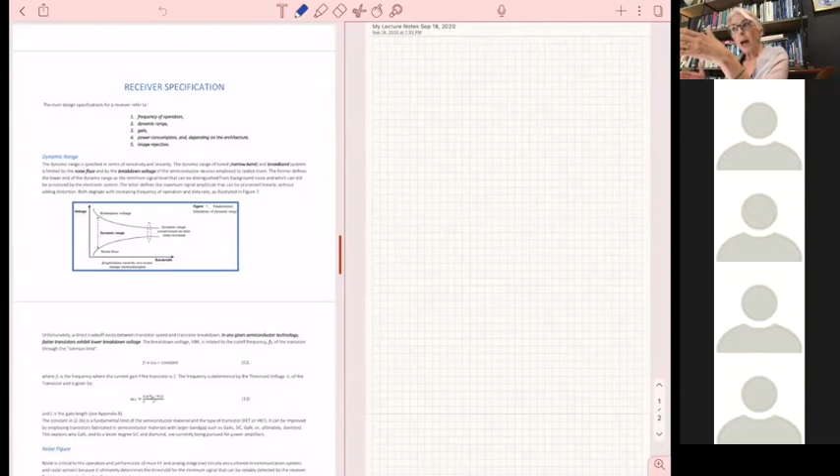You split the two paths before the mixing, and you mix the signals 90 degrees out of phase. So one path you call in-phase, the other path you call quadrature, because it's 90 degrees out. You mix them, and then you either recombine them or mix them again and so forth. But the idea is, whether you have a mixer before, a mixer after, two mixers after, and so forth, the goal is to split your signal into two paths and introduce a 90-degree angle into one path's phase. This way, mathematically and accurately, you cancel out a very large number of spurious frequencies that would be very difficult to get rid of in the IF.

That's the basic idea. Then we talked about the direct conversion receiver and some of the issues with DC offset and so forth - there is a possibility of getting DC through your receiver and everything. And how people have dealt with that by also introducing I and Q paths in a direct conversion receiver. Okay, so that is the basic idea.

Now, what I would like to do is talk about receiver specifications. If you try to do a design of a receiver, you will have specific numbers in mind that you have to satisfy. And of course, one, as you can see here, is the frequency of operation.

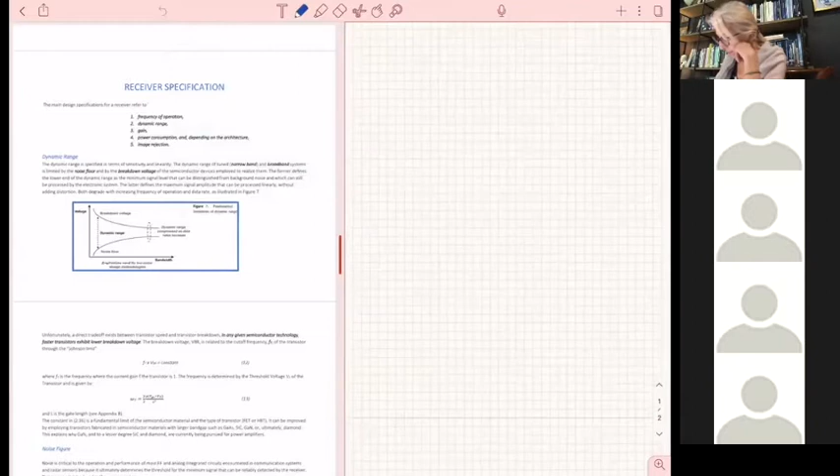So if I were to write here, I would say number one - okay, well, that does not want to... I don't know what the problem is. One. All right, well, let me try again. All right, I will just talk about this and I will show here. One is

the frequency of operation, and the frequency of operation here is important to have, because that's exactly where your receiver operates. And I told you, you will have selected by Monday your frequency of operation, your bandwidth, and the type of your receiver, hopefully.

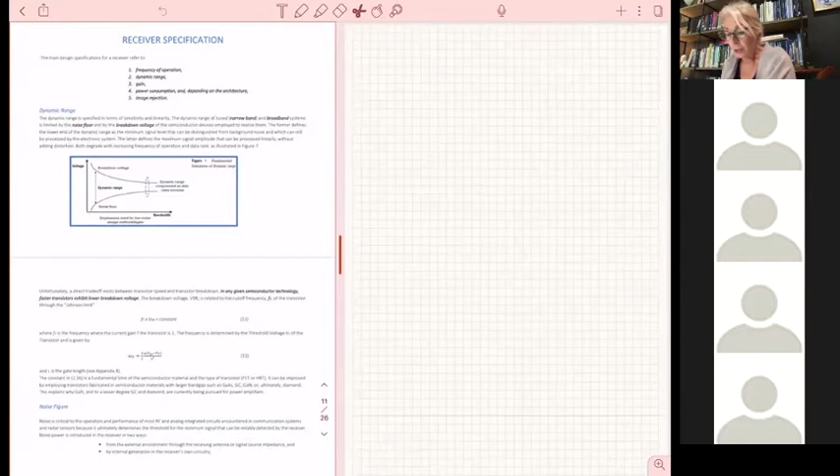Then these are fundamental. After that, you talk about dynamic range. What is the dynamic range? You can see it here in the picture. The dynamic range, practically - I think it's, the problem is my pencil, which is supposed to work. Okay. All right, then cut.

There it is. It's nice software to work with, but it also has its own problems. So the dynamic range says the following: in a receiver, we bring a voltage in. This is the voltage that you bring into a receiver.

When you bring the voltage in, you would like to have a receiver that can go from very low voltages to very high voltages, and that is called dynamic range, because then you can go from very, very low signals to very, very high signals.

Unfortunately, this dynamic range has its own problems. You see a reverse relationship. Unfortunately, what happens in most designs is that the two parameters we want to increase at the present time are related through a reverse relationship. So that's why we always have to do a design compromise - what we call trade-offs.

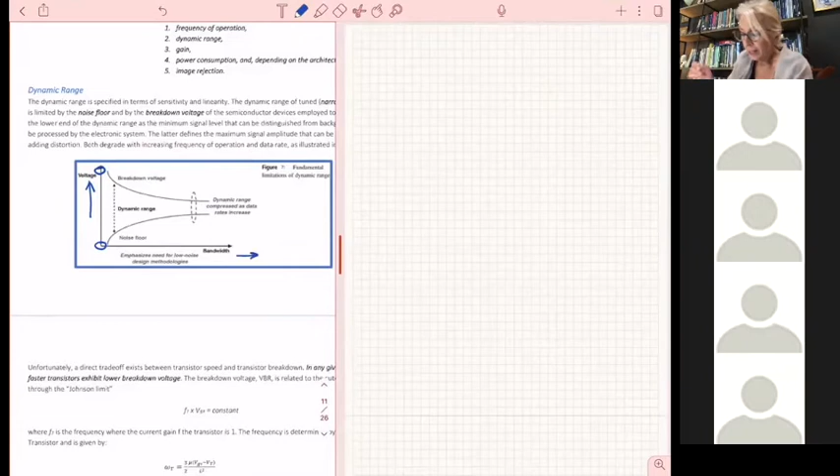If both things were increasing at the same time, and if both things were decreasing at the same time, it would have been much easier to make a good design. But for example, we would like designs to have very large bandwidth, but the problem is that the dynamic range becomes narrow.

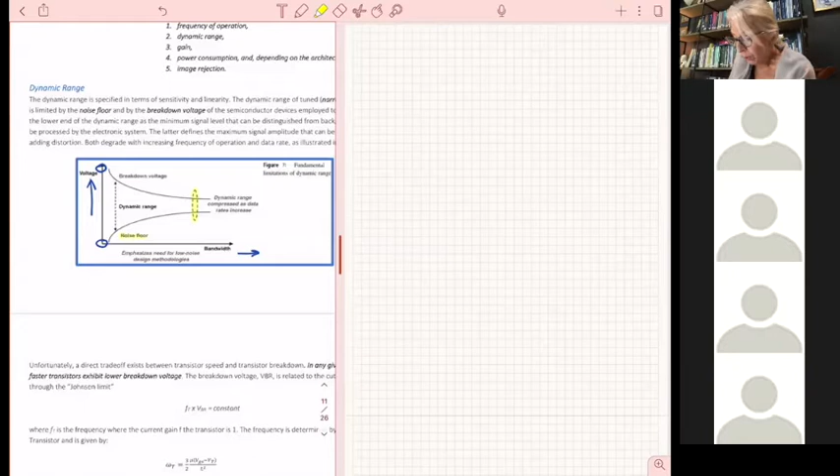And there are reasons for that. In the design, we have to reduce the noise floor. The higher the noise floor, the more your resistive losses, the more your dielectric losses, the more whatever other sources of noise you may have from your transistors and so forth. We talked about some fundamental thermal noise, which is fundamental to resistors and other resistive losses you may have.

In the dielectric. And then you have some flicker noise, which is important for the lower frequencies, and some other things that come from the transistors. So all of these are noise sources. As your noise grows higher, then as your bandwidth grows higher, you have a reduced dynamic range.

What happens when the noise goes higher? You cannot see as low signals anymore - you lose your signal into your noise. For example, if your signal were to be at that level, you can see the signal in the low bandwidth, but as you go into higher bandwidths, the signal is lost into your noise and it's very difficult to demodulate it. The other thing is, of course, as the bandwidth increases, your breakdown voltage decreases.

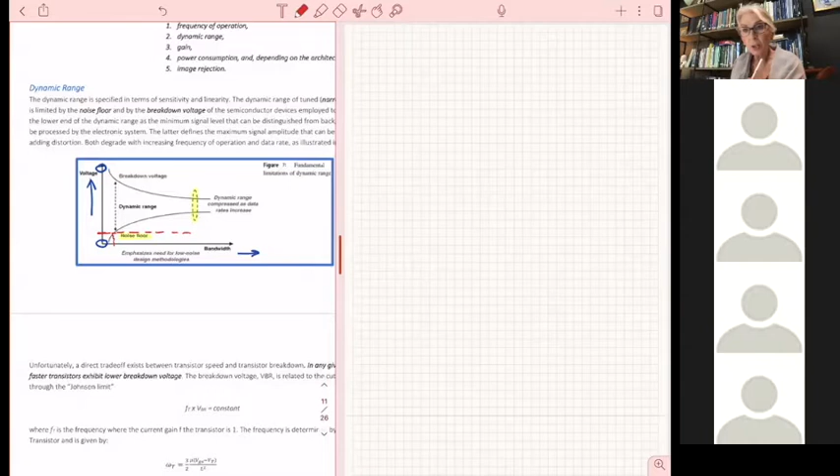And also as your frequency increases, or the speed of the device that you have increases, your breakdown voltage decreases. And for those of you who have done MOSFETs, remember that usually the current flows from the source. So the gate looks like this.

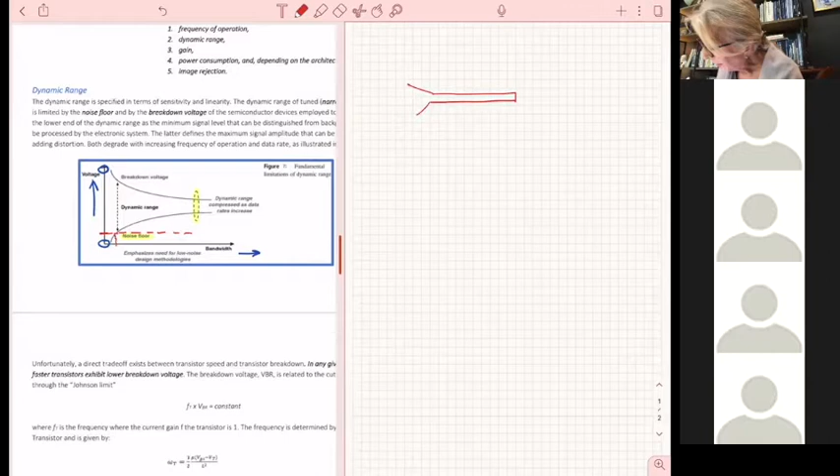We talked about that some time ago. The gate looks like this, and then you have your drain here. The gate length, and the material below the gate - the gate length itself and the gap - are extremely important in how much current will go from the source to the drain and how much current you're going to have from the transistor.

However, to be able to achieve that, you need to do two things. You need to reduce the gap below the gate to make it faster, to make the electrons go through faster. And then also you need to reduce the length to be able to have better performance and more bandwidth.

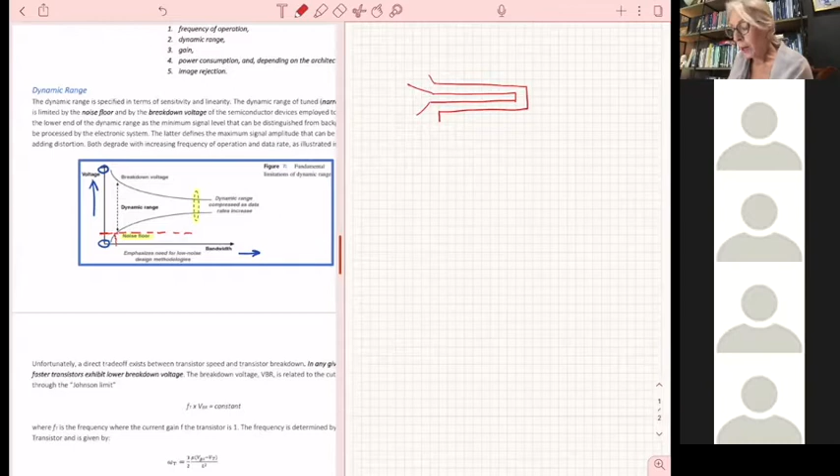In the process of doing that, however, because you reduce the thickness of the dielectric, the breakdown voltage becomes much lower, because now you put a lot of voltage into a smaller thickness of dielectric, and then you have a breakdown. The same thing applies with the bandwidth - as you increase your bandwidth, not only does your noise go higher, your breakdown goes lower, and then you lose your dynamic range.

So dynamic range is very important. Then we talked about FT, which is exactly where the gain of your amplifier becomes 1. The FT and F max are extremely important, because both frequencies show you very high frequencies. So if you operate a transistor at 40 gigahertz, your FT and F max have to be very high, like 250, to be able to have good performance.

Otherwise, if you're too close to your FT, that means that the gain of your transistor practically has no gain - so that's not a good transistor. And when FT is very high, and F max is very high, then you have substantial issues with the intrinsic and external performances of the device. The intrinsic performance is important for FT.

The external parasitics, in addition to the intrinsic ones, are important for the F max. So both of them have to be very high.

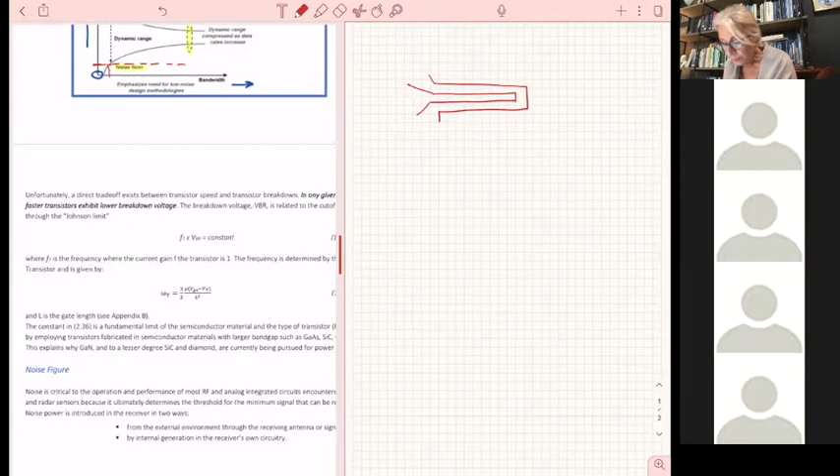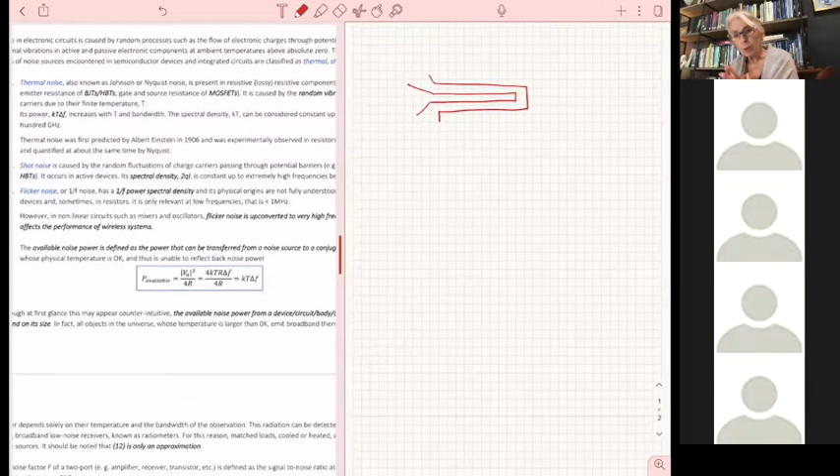Noise figure also is extremely important. We'll see this again, so I'm not going to spend too much time on it right now because we are going to calculate that later. Noise figure, however, is extremely important because it's connected to your losses.

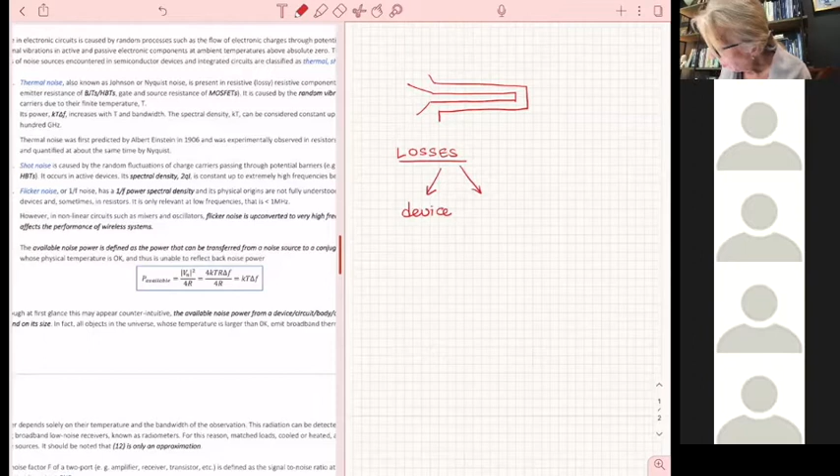We said you have two types of losses, more than two practically, but you're going to have losses from your device, and then losses from your matching networks. Matching is going to be absolutely critical to make a device operate like a low noise amplifier, or if you are in a transmitter, like a high power, high gain amplifier.

Usually low noise amplifiers have lower gain. Let's assume you want a high gain amplifier, you can compromise your noise, but you still have to match it. What you use in your matching networks is extremely important.

Your device is going to be whatever you have intrinsically in it, plus the external parasitics. For example, what are the external parasitics? Your device comes with pads so something else can connect to it.

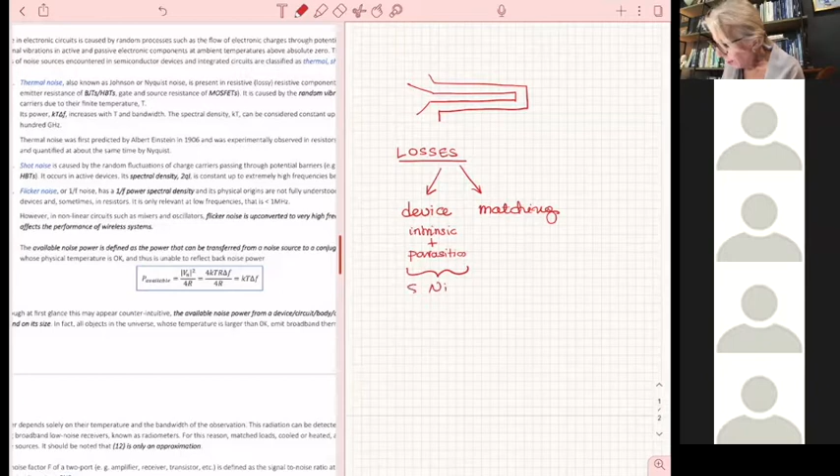Those pads include parasitics. Your device designer, not you, will give you the device, and for most receiver designs, they will give you the performance specs. So they will give you the noise characteristics of the device, or what we call the signal to noise ratio, or they can give you this factor, which is called the noise factor.

All of these are connected to two kinds of losses: resistive losses due to metals, resistive losses from dielectrics, and then resistive noise from the device, plus intrinsic noise from the device. All of these will be incorporated here.

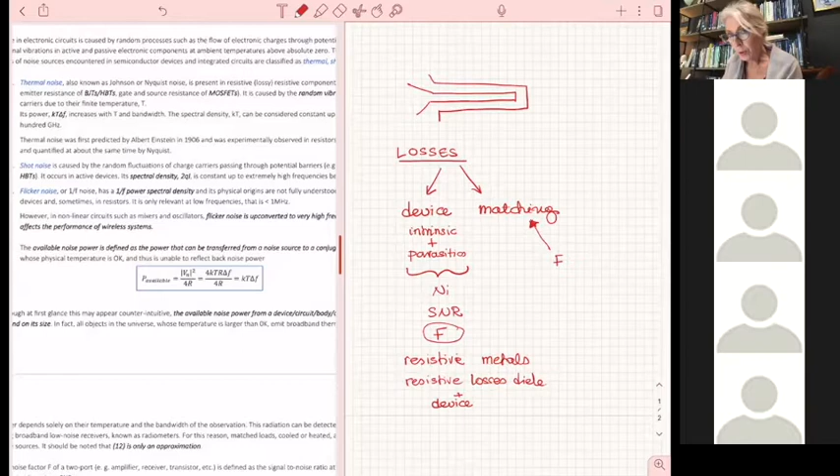As a designer of the receiver, your goal will be to identify the matching networks and then identify the F of this network. So eventually you would like to find the F of the whole device. So practically, how do we define the noise factor?

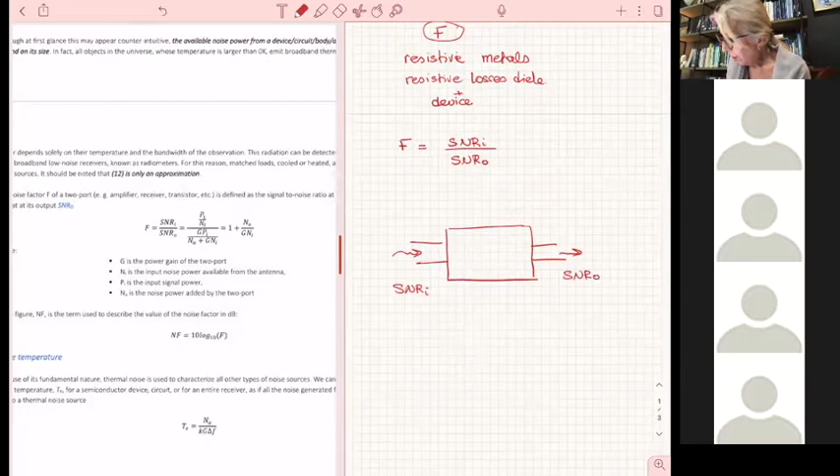F is the signal to noise ratio that goes in divided by the signal to noise ratio that goes out of your device, or whatever circuit you are analyzing at that point. It could be a 2-port network. If this is SNR in that goes in, and this is SNR out that goes out of the system, then the ratio of the two is the noise factor.

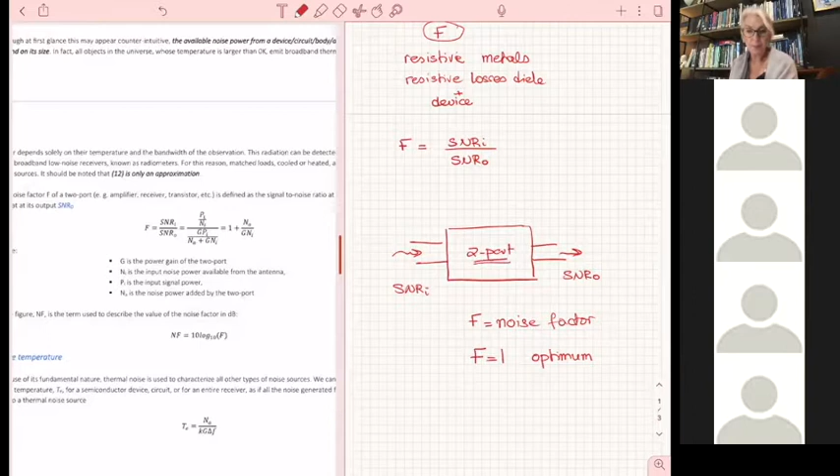That noise factor, the way we have defined it, at best is going to be 1, which is the optimum. That practically says that in terms of noise, your 2-port network does not add any noise to the system. So optimum F equals 1.

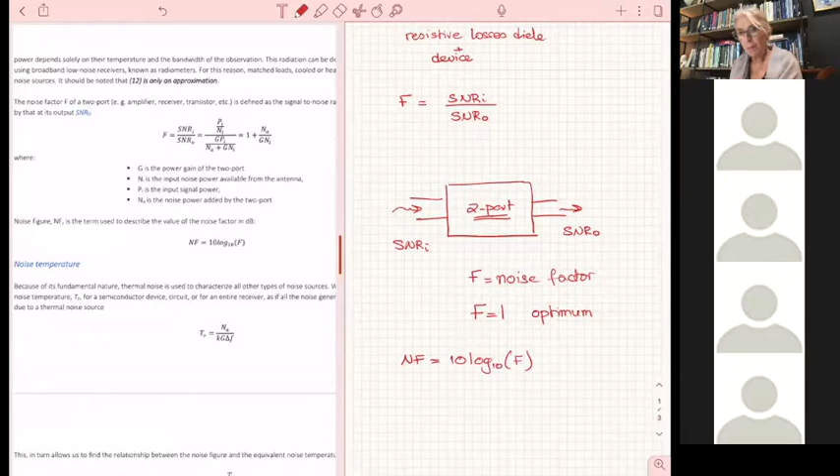Then we have the noise figure, which is the 10 logarithm of F. Why 10 logarithm? Because F is always in terms of power. When it comes to noise, yes, we are using equivalent noise sources like voltage sources or current sources, as you have seen in active devices, but here, when we start talking about networks, we are talking about power, noise in power.

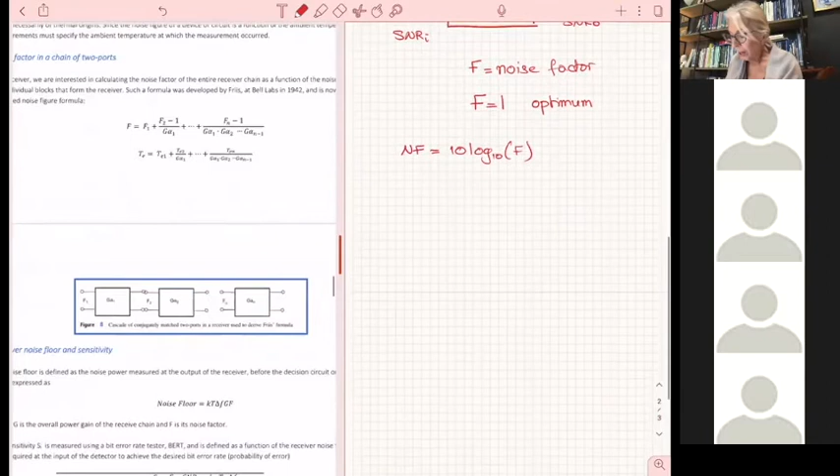We'll come back to noise temperature and all of this. I would like to show you that now because we have talked about networks, and I would like to show you how eventually we will calculate the losses of a network. Practically, as you remember, we combined networks, and we said that if we have networks connected like that...

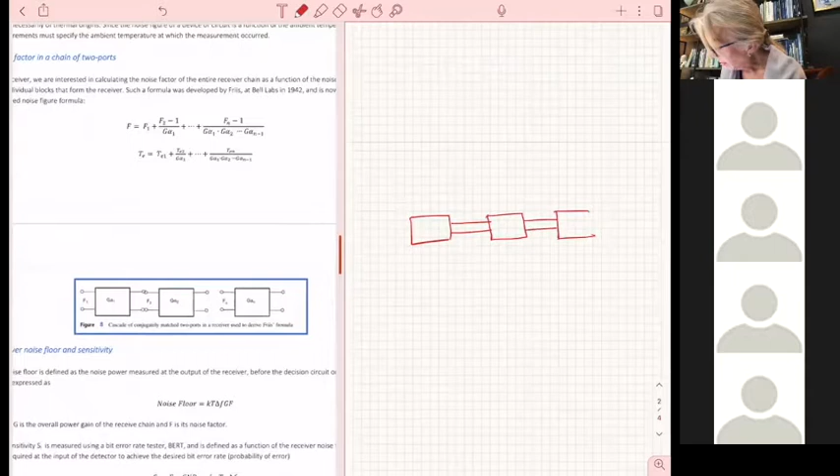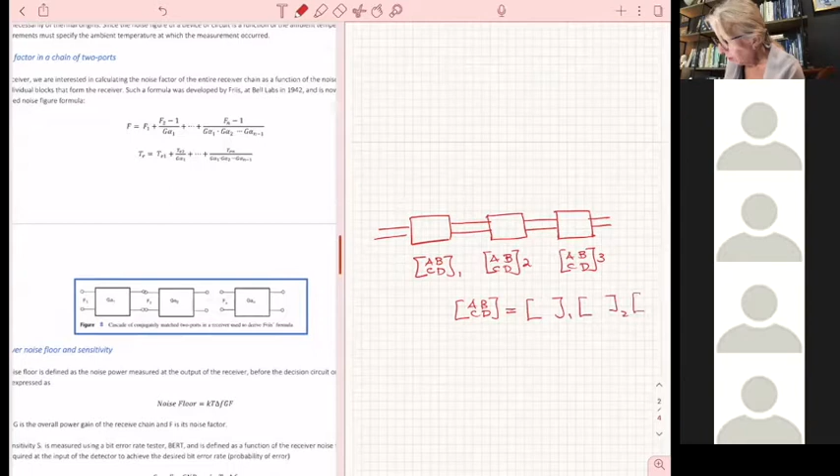If we identify the A, B, C, D matrices of network 1, 2, or 3, then practically we can combine them to find the total one. The noise figure is not any different or independent from this. Practically, by using this approach, the total A, B, C, D matrix is going to be the product of the three.

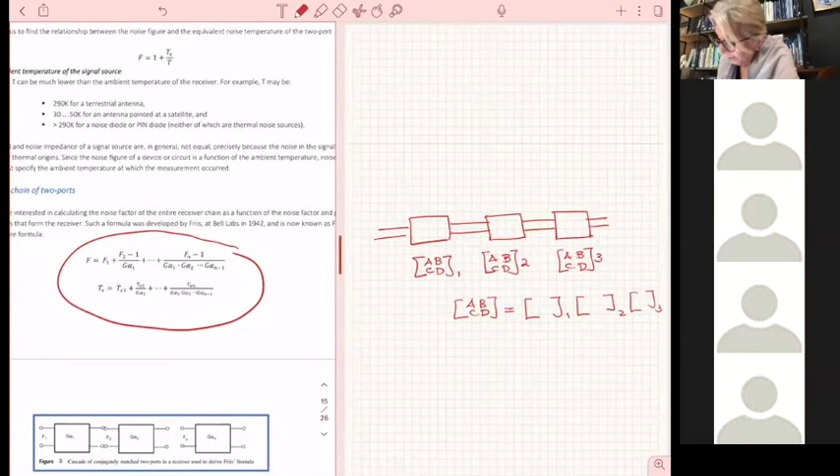Then you can also demonstrate this very important formula for the total noise factor F. If this is network 1 with gain G sub A1, this is network 2 with gain G sub A2, and so forth up to network N with gain G sub AN, then practically your total F is given by this summation: F1 plus this formula, and so forth.

Now, why is that important? Because you can take your receiver, and let's assume you have a simple receiver: your antenna, here your bandpass filter, here a low noise amplifier, and let's assume you do one mixing stage for a moment.

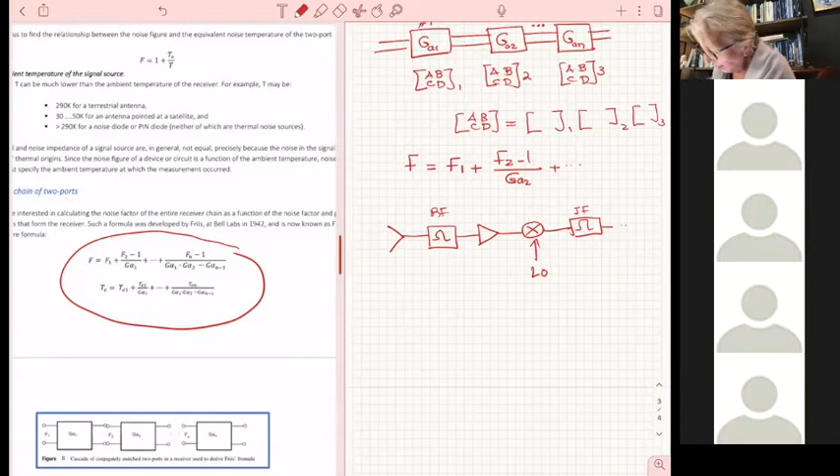Then you have here your IF filter, this is your RF, and so on. Let's assume you stop there for a moment. Then you can split that into the antenna. We're not going to design the antenna, so this is going to be your GA1, F1.

Student: So input, I have a question, is that supposed to be F2 minus 1 over GA1? Instructor: Yes, thank you.

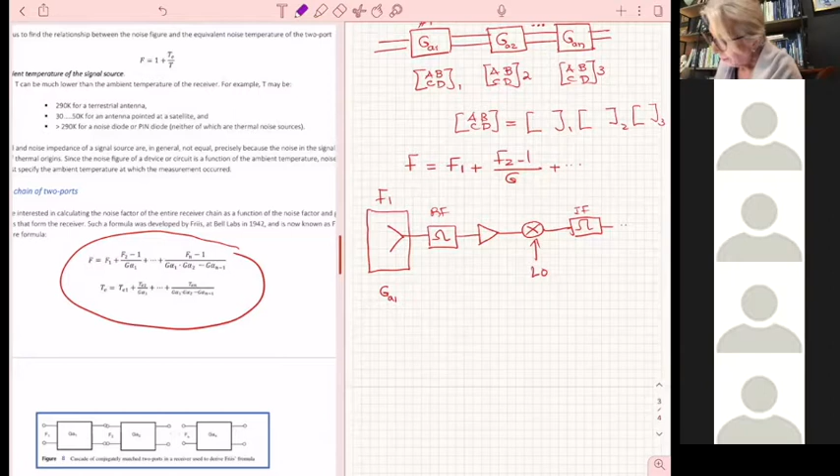I think that should be alpha, as it is on the notes. It's not A, it's alpha. Here they have it as A. It does not matter.

So, and then F2 and so forth. Either you can start, you will see applications where your first network is F1, or they will say that this one here is my input. I don't care about the antenna, I will assume whatever comes from the antenna is my input here. And this one is my F1 and has, of course, a GA1. And this is my F2, and so forth. So practically, you can treat each one of them as one 2-port.

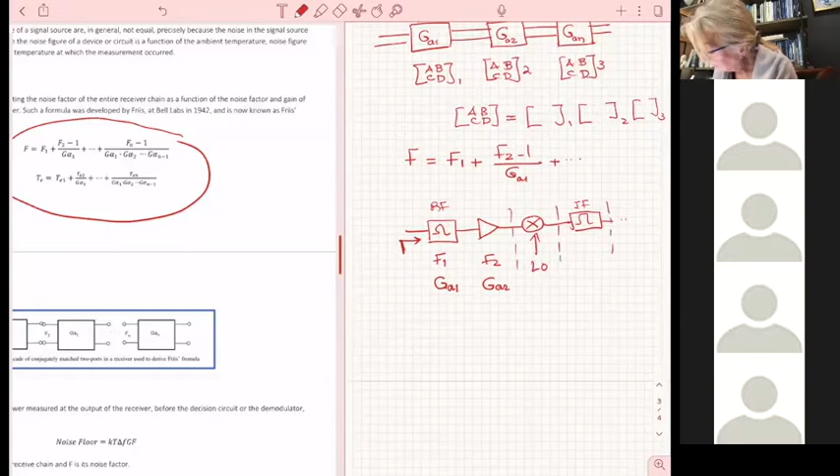Even if this is a 3-port, eventually you can treat it as a 2-port, as you will see. And then by using this formula, you can find your noise factor of your whole receiver, at least the part of the receiver we are responsible for. That's why this formula is important. So you can break down your whole receiver into parts, and that's what we are gonna do.

Every part of your receiver that you're gonna design is gonna be 50 ohm line in, 50 ohm line out. And if there is a matching, it will have to be inside your network to make it easier. That's what I would suggest. Others may select to do it a little easier, and say I don't want to have one matching network from my filter on one end and another matching network from my low noise amplifier on the other, and I would like to just match them directly. You can do that too.

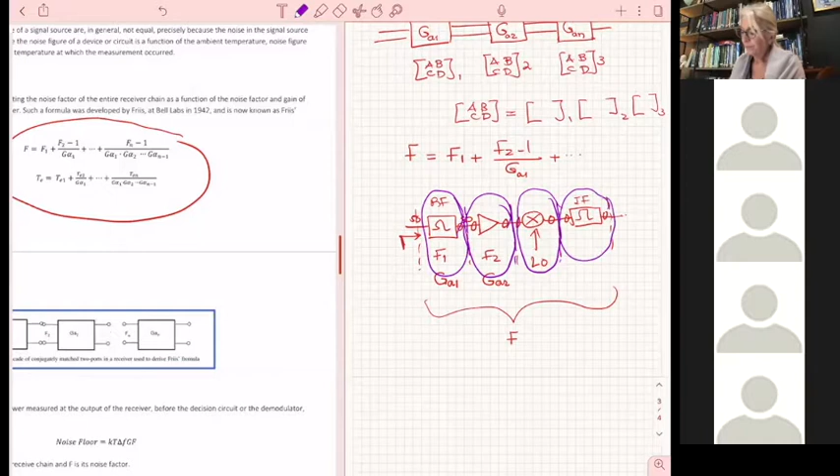But at the end of the day, the easiest thing is to break your receiver into parts and deal with each part separately. Identify all of the characteristics for each of these parts and then combine them. That's why this is important.

Now, with that, since we are talking about noise, we have seen noise before. We have not talked about it in the form of noise, but we have seen losses and we have talked about the impact of losses on Q. Do you remember why we talked about losses and then indirectly it is included into Q? Why is that? Do you remember how we have defined Q?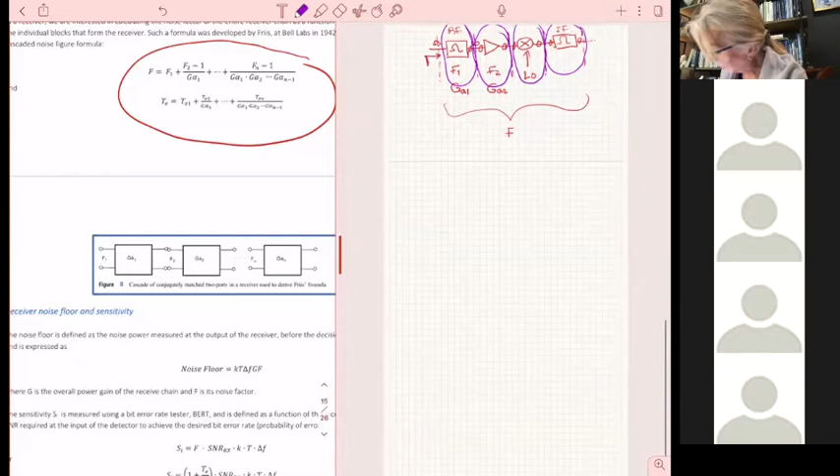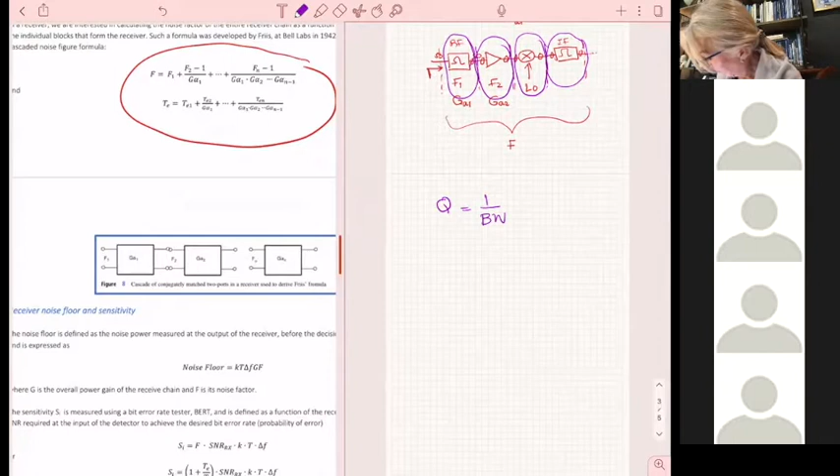How have we defined Q? Student: 1 over the bandwidth. Instructor: Yes, that is the outcome. You remember that, all right? So Q in reality is 1 over the bandwidth, very important relationship. If you know one, you know the other, obviously. Student: And it seems like that corresponds to the first graph, that as bandwidth increases, the noise floor increases as well. Instructor: Yes, exactly, you see that correlation here, all right?

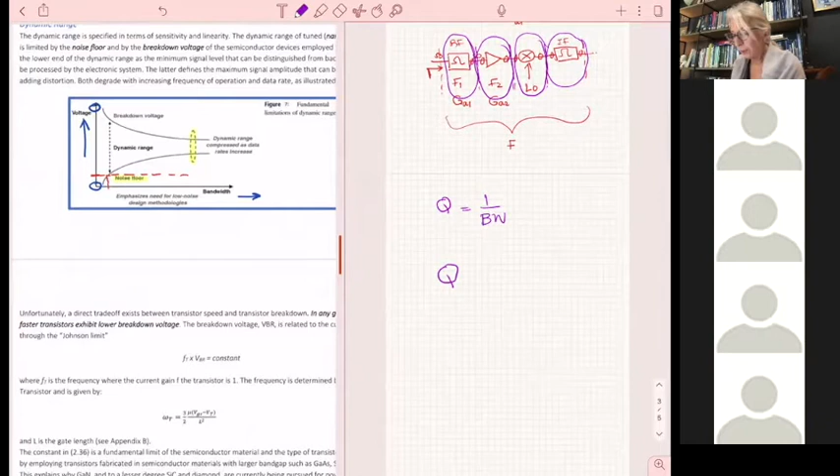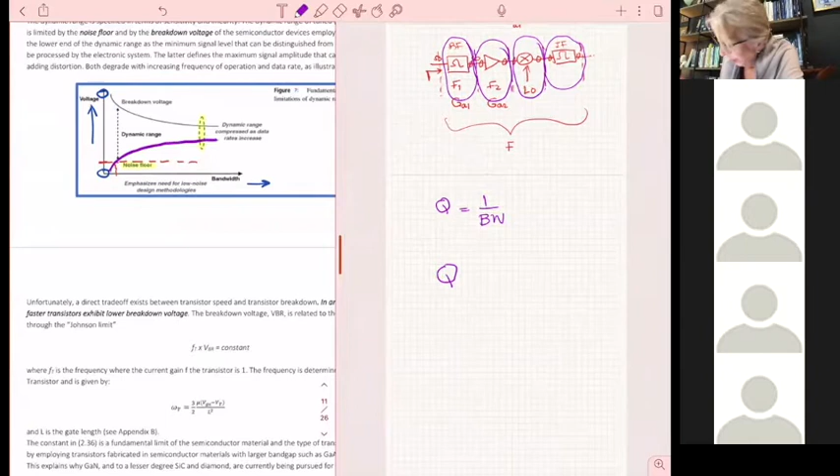Absolutely, here. Absolutely, so here now, let's look into this. It's just a correlation, I call it here, but we have seen this formula. How have we defined Q before we found the formula? We defined Q as what? Is it sensitivity, or... I guess.

Yeah, you remember though, it was W, what? W, could you tell me, somebody? The resonant frequency over W2 minus W1, or is it the other way around? Student: It was, Q was the ratio of two things, the stored magnetic energy or electrical energy divided by the dissipated power. Instructor: Exactly, it was the stored magnetic and electric divided by P sub D. You remember that? That was the initial definition, the original definition.

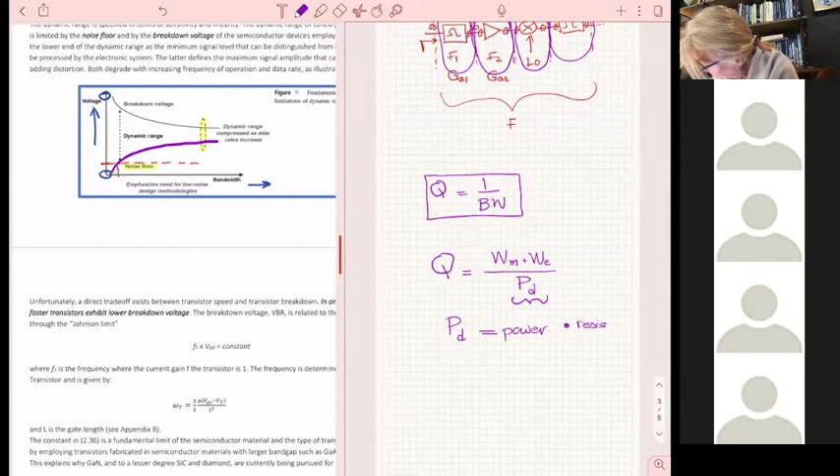And then of course, there are all kinds of outcomes from this. Now, dissipated power is power lost in the system. Yes, yes, okay. And this one now, the PD, is power loss in where? Student: In resistors. Instructor: And these are resistors you may have incorporated explicitly, all right, into your design, and metal losses, which are also resistive losses.

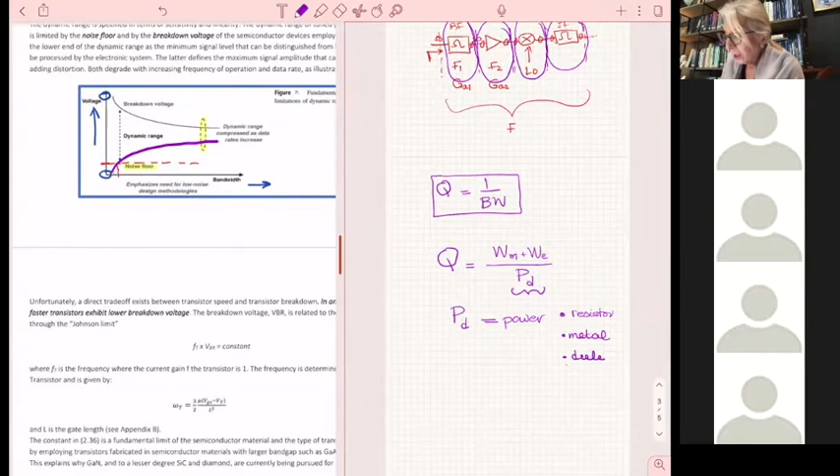And dielectric, all of these are thermal noise. All of these losses, all of these mechanisms that we call losses here, give rise to what? Dr. Katehi? What is the word below metal? Dielectric, sorry. Okay, all of these losses, what do they give rise to? Noise. What kind of noise is that? Thermal. Remember, we'll see that again.

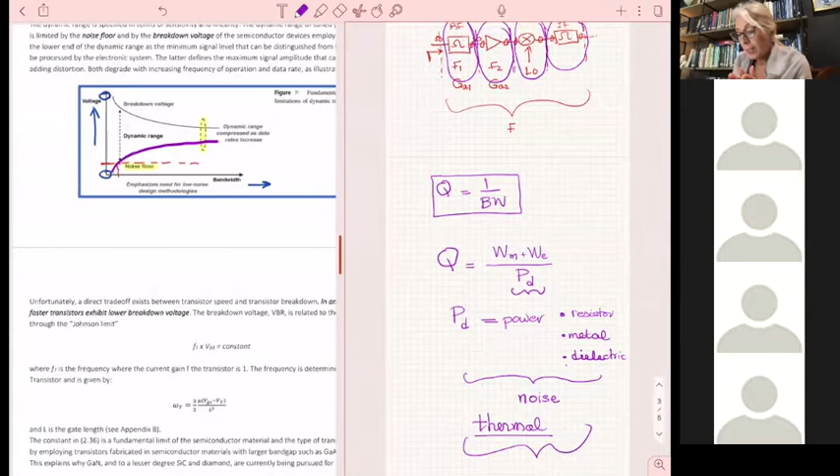So your Q is another measure of your noise. And why do we call it Q and bandwidth in the passives, and noise figure in the actives? For obvious reasons, because obviously in passives, the only noise that you have is thermal noise. But when you start having active devices, you have other types of losses, not just thermal. So those who dealt with thermal noise, in the beginning we started calling those resistive losses, and then eventually Q, and eventually we went to bandwidth. But when you go into bigger systems, instead of Q, you're talking more about sensitivity or noise. But they all mean the same.

Any questions so far? So that is in terms of concepts. But now I would like to go to the homework, because we'll come back to noise in more detail.

Is another way of thinking about it, Q only has linear losses and F has nonlinear losses? How do you know, how do you define linearity? Directly related by a coefficient, I suppose. But what to what though? Voltage to current. That, yes, in that regard, yes.

In relation now, when you go to power, however, the relationship between power and voltage is not linear. I mean, it is linear, but eventually if you go only with voltage, V squared over R. VI, it's squared. Right. So, but I understand what you're saying. Between V and I, it is a linear relationship. The relationship between V and I is linear. That is true for passives, practically. And because of that, we do superposition.

You know, the interesting thing is that in noise, you cannot always superimpose. So we have to be careful when we do that. We'll talk about this a little later. But in passives, we'll have to remember the V and I relationship, but when you start going into V only, it's not linear. But if the noise is not correlated, you can sum it up. We'll go into details later, I don't want to talk too much about this.

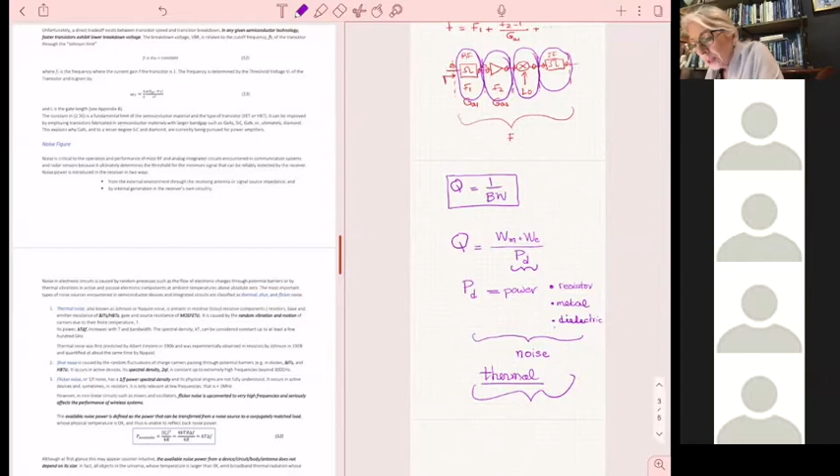I guess one more question relating to this and to the projects. So, the whole bandwidth issue, is that what makes 5G kind of more challenging, because 5G has greater bandwidth, and so you have to deal with the more sensitivity, the noise, and breakdown voltage? So here it is, I think, what makes 5G more challenging.

Bandwidth is also connected. Of course, bandwidth and Q are connected. Higher bandwidth, lower Q is a problem, obviously. More noise in place. However, that is one trade-off. But bandwidth is important because you can transfer more data. You need more bandwidth to push a lot of data into the system. For example, when they say 1 gigabit per second, you need every second to push 1 gigabit through the system, and you cannot do that without having enough bandwidth. So the challenge with 5G is that you need to have the maximum possible bandwidth that you can be allowed to use, with the maximum possible sensitivity in your receiver. And that's a problem already because of that.

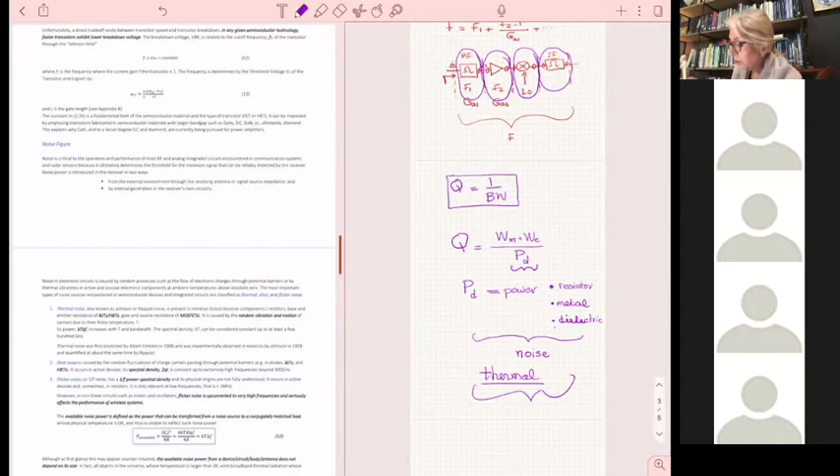You try to optimize two entities that are connected in a reverse way. Ideally, I would try to optimize my bandwidth and optimize my Q, and both have to be high, and I can't. So that's the problem of the design, all right?

Is there an equation that relates data transfers to bandwidth? Yes, and we are gonna look at this. We will have time, practically. But there is, yes.

Okay, can I go to our problem? Yes, sorry, just one more thing. So does increased bandwidth allow more data transfer because basically you have more channels for the data to travel on? True. Yes, you have more channels and therefore you can demodulate them independently.

And then the channels have to be separated by something. We have not covered that, don't have time in this class, but 5G is using OFDM. OFDM is a type of modulation where you use multiple channels. Some of you who have been looking for 5G receivers will see how many different channels they're using, sometimes up to many. I don't want to cite like 18 or more. There are some extreme systems that have hundreds.

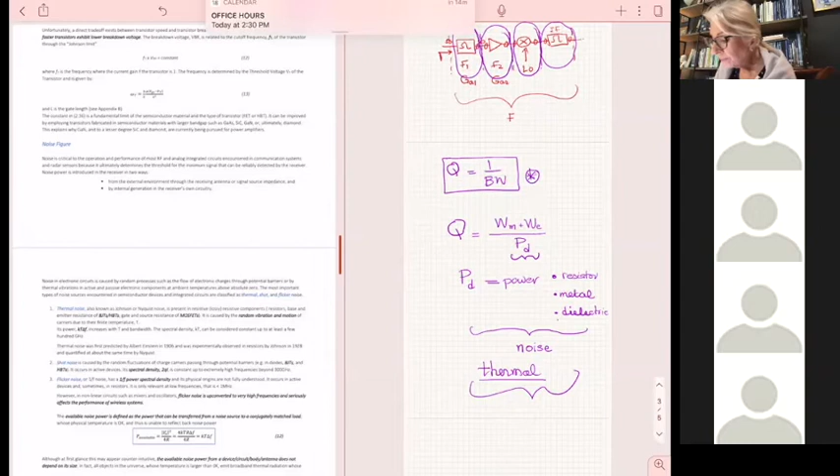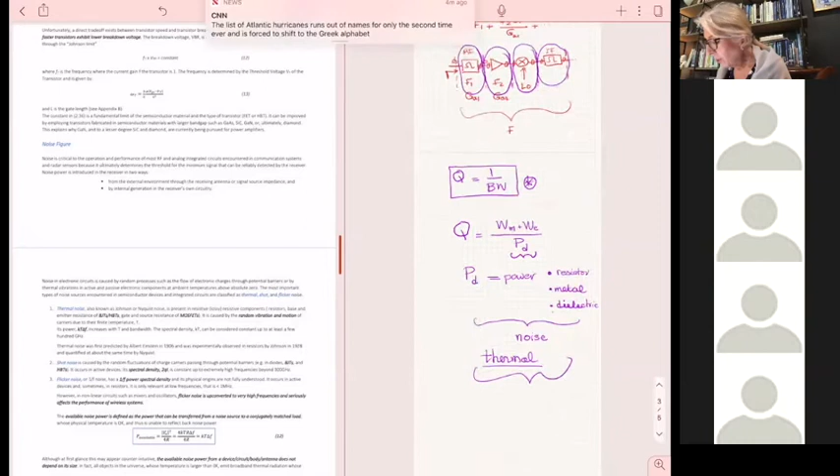Okay, now remember Q, okay? Remember losses, remember noise. Now we are going to your homework. I will start now and I will continue at 3 if we finish with this class. I would like as many of you to join me then. But let me look at the homework 5.

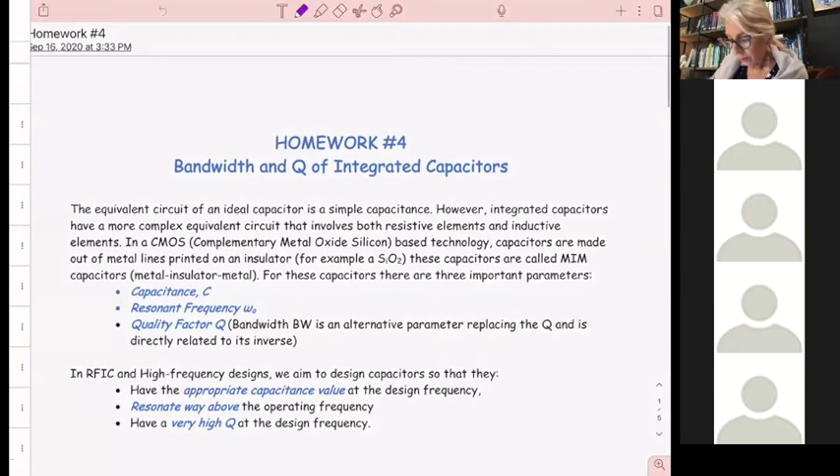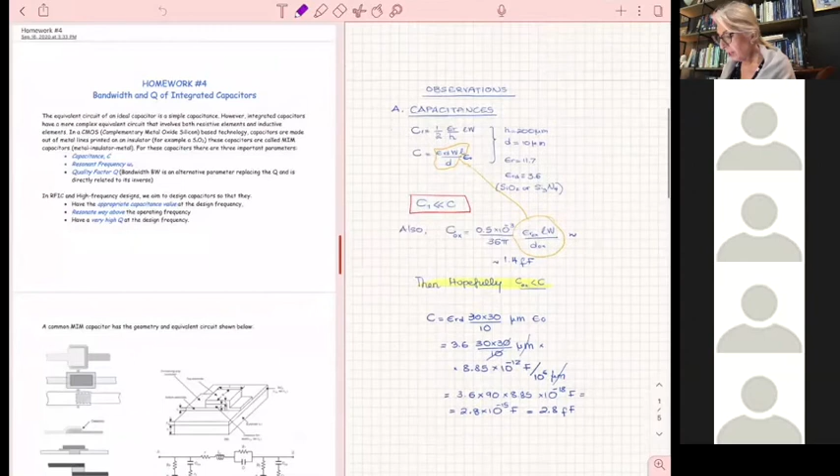Homework 4, I said 5, 4. Okay, I'll take this one first, and then I'll go to homework 4 solutions, and not exactly that. Forgot, solutions on the right. Okay. I'm not solving everything here, and if I do, that's okay. I would still like you to have a good solution in the problem.

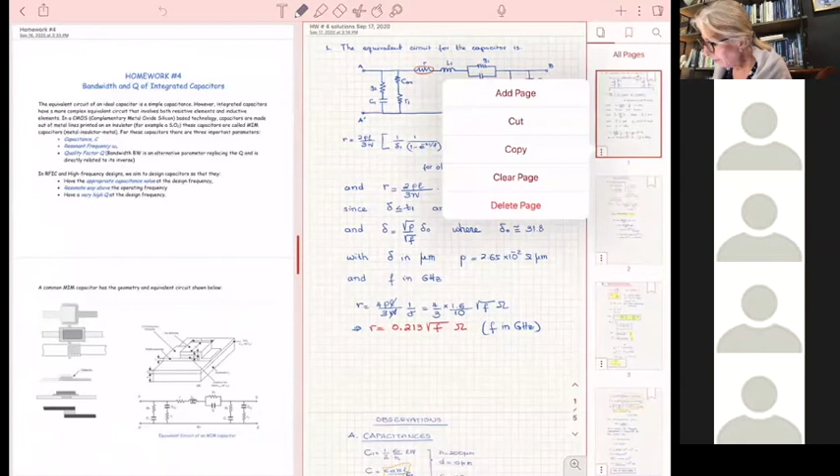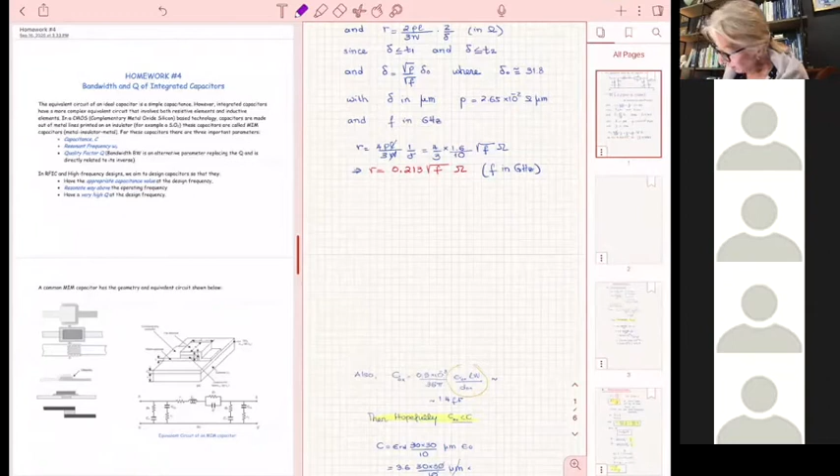I'll say something generic right now, which you're gonna use in any other problem I give you and ask for similar things, or in your project, okay? So let me add a page here so I can talk about this. When you have a passive circuit with a combination of resistors, capacitors, inductors—it could be, now this is whatever I do here, it's not real, I'm just showing you—let's assume you have something like that, and you want to find your Q or your bandwidth, or other things, then you have to be systematic on how you look for things, all right?

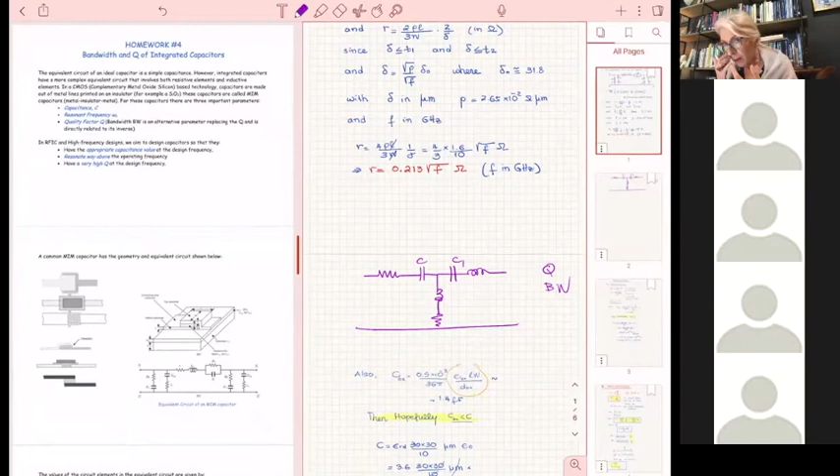And in the problem that I gave you, I explained physically where the different elements in your equivalent circuit came from. So why am I saying that? Why am I saying you have to be systematic? Systematic means I will start with every type of circuit separately. Let's assume you have a capacitor here, another capacitor—I will look at capacitors first, I will look at inductors and resistors in groups. I'm not gonna lose myself into a cacophony of every single circuit component and get lost into the weeds, all right? Because that's gonna happen.

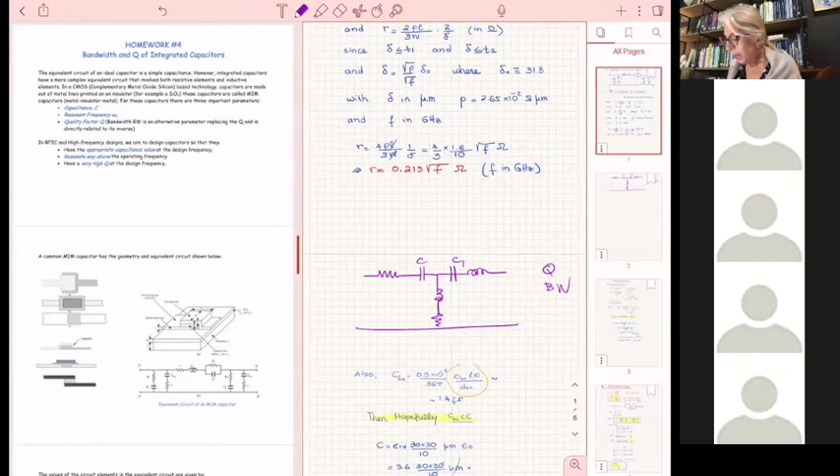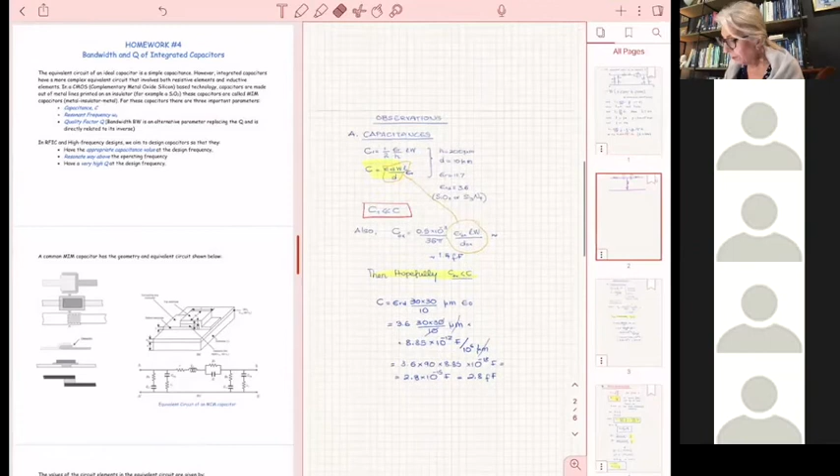So that's how you're going to have to be systematic in every design to be able to manage the complexity. Here, for example, in that circuit, let me mention, look at the circuit, you have to understand, because physically understanding—a lot of times you say, well, you talk too much about the physics, you just show us equations, and then what do we do there?

You have to understand the physics. Equations are a way, a language, to understand what is happening, physically speaking. You have to understand the physics. You look at the equations or you look at the circuit and you need to understand what is happening.

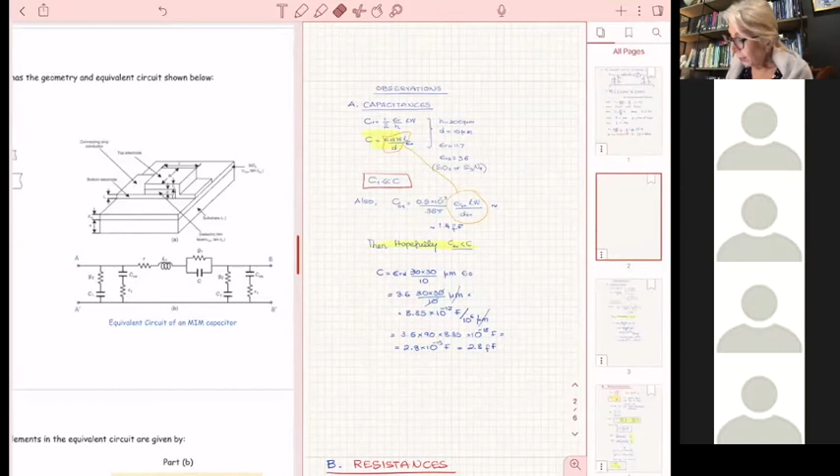So here, for example, what I understand is that this is my capacitor. I'm designing this, this is a capacitor, all right? This is an MIM capacitor, this one here. And practically my capacitor comes out of this region. In fact, if I want to remove that, I will do it a little here. My capacitor comes from here. So I need to understand that this is my centerpiece—this is my capacitor.

Then I look—I'm not going to design an MIM capacitor and have a horrible capacitor, obviously. So the dimensions that I have given for this one were like the thickness. So the MIM capacitor, if you look at this by itself, is like a parallel plate capacitor, practically. And then it has a dielectric in between.

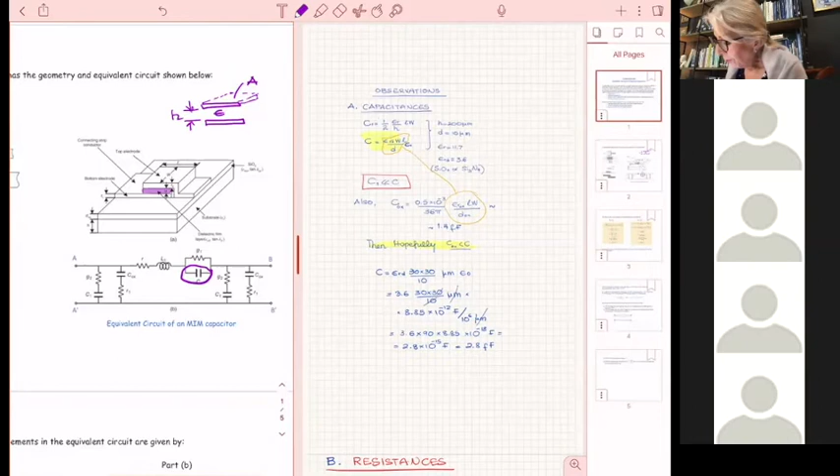So what is important in a parallel plate capacitor, let me just do it here simply from previous classes: the area, the distance (thickness), and the material you have in between, epsilon. Do you agree with that? This is important. Why? Because how do we get the expression for a parallel plate capacitor? A parallel plate capacitor is epsilon times area divided by H.

So this is my centerpiece, C, and nobody has given you that. However, you know this is what you get out of the center, practically. That's how you design that piece there—you design your capacitance, and then you try to find what is going to happen with all of the other parasitics that you see, which are all around it. So practically, this is your centerpiece, and everything else is a parasitic.

Okay, where are the other parasitics coming from? Since we talk about only one type of element, we are going to only talk about capacitors right now. So how many other types of capacitors do I have? Two more—I have one capacitor here and one there. And where do they come from? They come from different parts of the geometry.

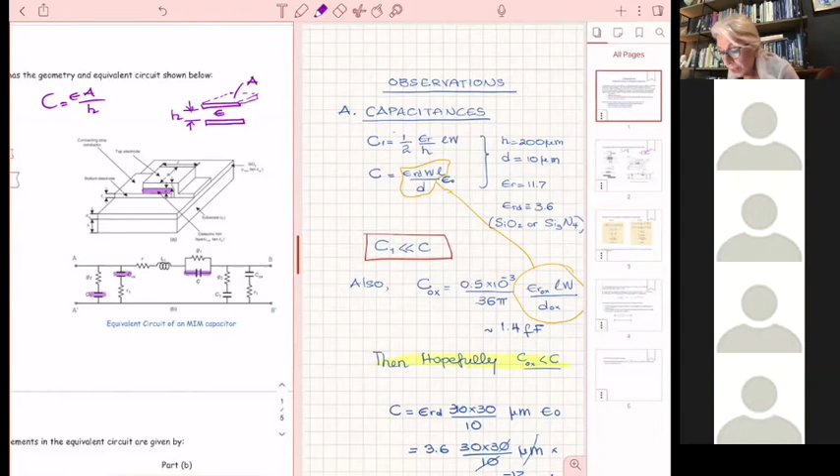So C1, according to here, if you observe that, C1 comes from this dielectric. Practically, why is that? Because I have my lines, which are here—my metal lines are these ones, okay, you see them? This is my metal here, and then here with an opening. There's an opening there. And then I have metal down here, obviously.

So I have parasitic capacitances from my metal up here to down there. So I have this one—let me, in fact, do them. I have this one, that's my C1, is there. And then what else do I have? I have another dielectric, which is the oxide.

And then you have seen, for those of you who did MOS devices, you have an oxide, and then you have—the oxide is that—you have on top of the, or I may make the oxide with a different color, sorry, okay, that's your oxide. And on top of the oxide, which is here, you have these metals. And then underneath the oxide, you have other metals, because you remember a CMOS has 6 metals.

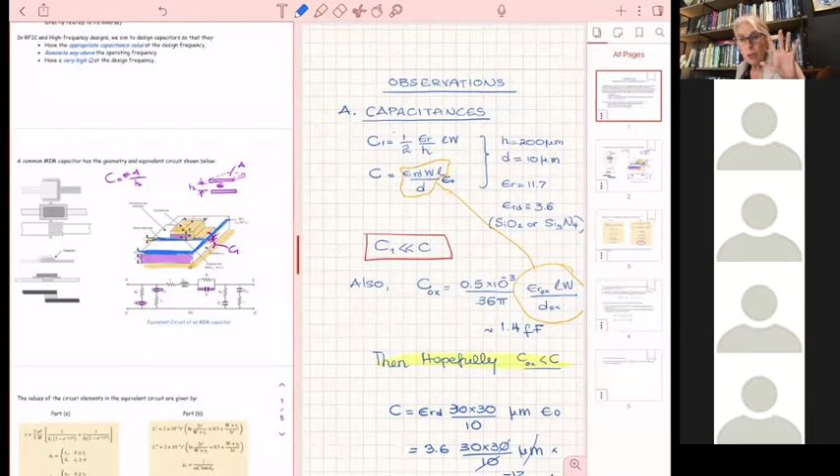And you're using for your capacitors the top metal, because you want to be away from other metals and reduce the parasitic capacitances. But you have another parasitic capacitance between the top metal, which is this one here, and whatever metal comes underneath your silicon oxide. And these ones are the C oxide—this is the C oxide, which you see here. All right? And then in fact here.

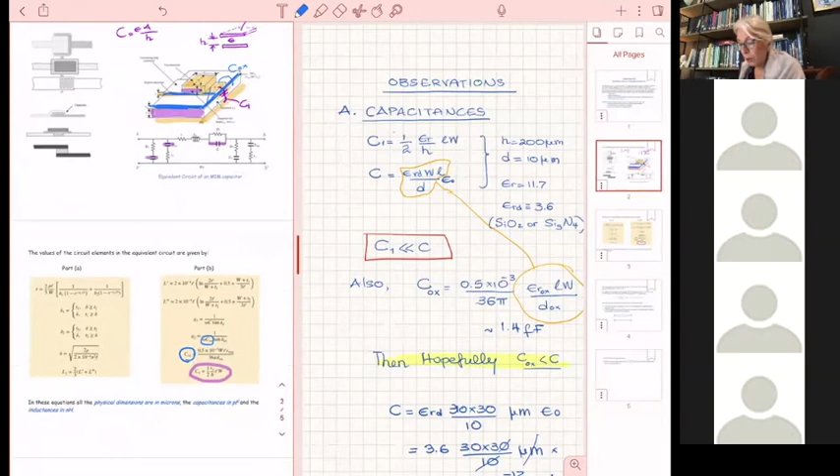So now you found the relationships for your 3 capacitors. You know that in this design, your masterpiece is this one—this one. If your C oxide is, and your, excuse me, did I say that one? Sorry, this one here, that's your centerpiece.

This is your main capacitor. You know that if C oxide and this one become large, then we have a problem, because these two capacitances here and here, we see them symmetrically, will become big, and they will start impacting the value of your capacitance that you have decided to design.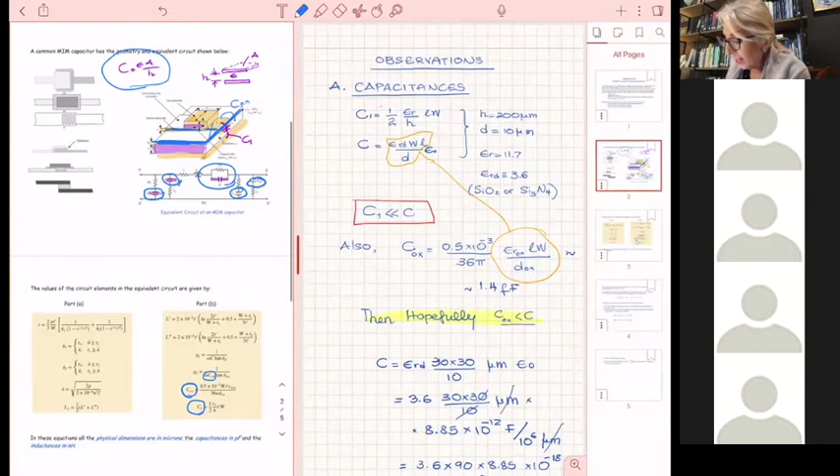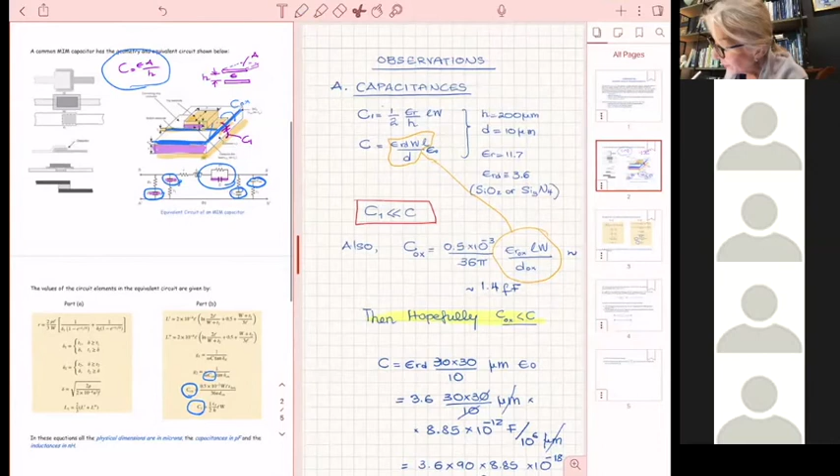But I have to calculate them, so I use the formulas. I find that C1, which is the capacitance that goes all the way down to the metal after the 200 micron thick dielectric of silicon, is much smaller than C. Of course it's much smaller because H is much higher than D. So we expect our capacitance C, which is our masterpiece, to be much higher than C1.

We expect to see that. Anything else—if you see a C1 to be the same as C, then something is hugely wrong there.

Then I go and calculate C oxide, and on the basis of what I found, C oxide is 1.4 femtofarads. I also want to tell you the following: it has already incorporated into this data, which I gave you from a book, and it was from a paper.

They have already incorporated the units everywhere, so what you really only have to do is put the values of L and W in micrometers, D in micrometers, and F in numbers of gigahertz. They have already taken care of the conversion of units. So as long as you keep all your distances in micrometers, capacitances will come immediately in picofarads, inductances in nanohenries, and your F has to be in gigahertz—you don't put hertz for F. If it's 1 gigahertz, you put 1. If it's 2 gigahertz, you put 2. That's how it goes.

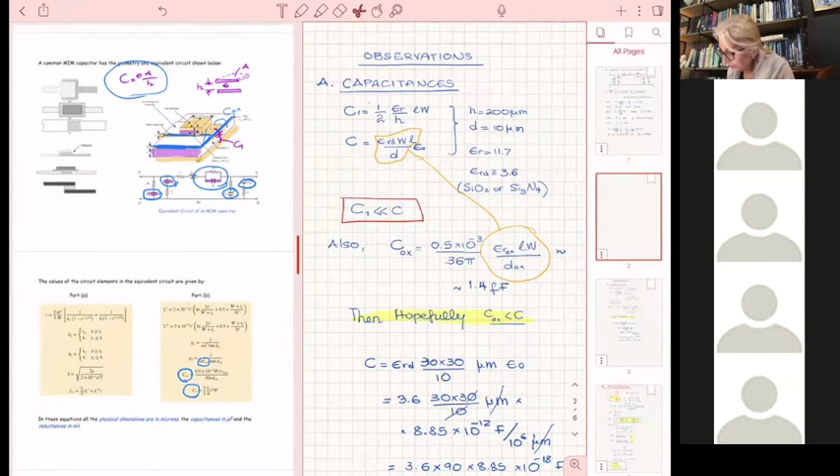Now I have to calculate my C. But for C, they have not given me a formula, it's my formula. So for C, I will have to put all of the parameters here, but make sure I get C in picofarads. Here, of course, is a very small number, so practically my C is in femtofarads because this is a small MIM capacitor. So, 2.8—what did I do?

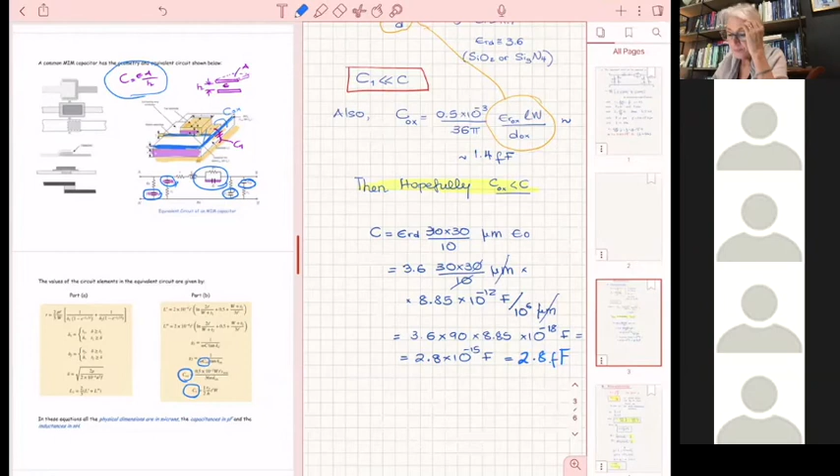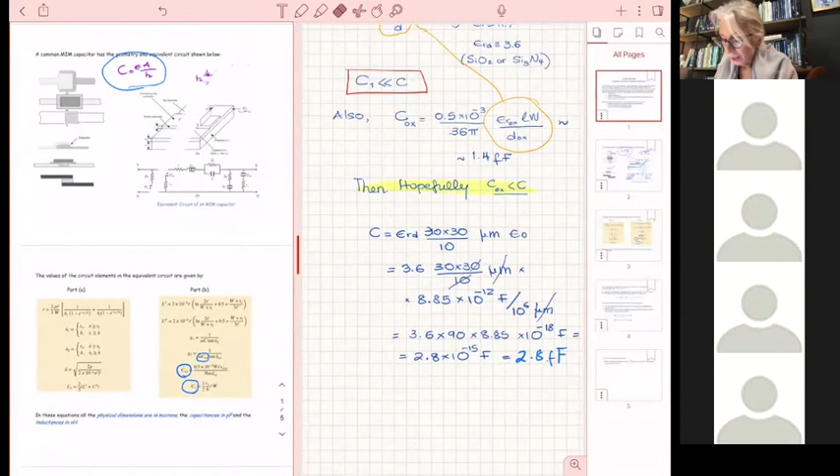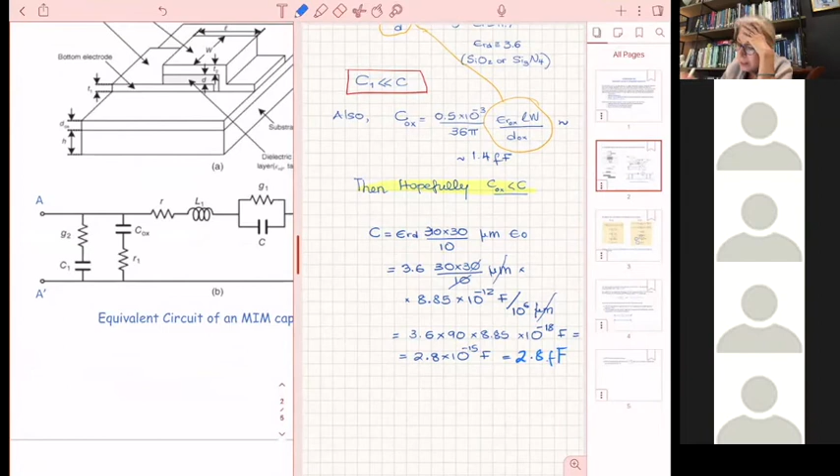I was looking at this picture and had another question - it seems like you would get some kind of fringing capacitance between these. Is that significant? In this paper it has already been incorporated. If, for example, in this particular case, D is 10 microns and W and L are 30, I would say I can ignore the edge effect, because the thickness between the metals is less than 1/3 of the width and the length. So if I were to include parasitic effects, they would be minimal compared to what you get from the other problems, like from here. They will be additive capacitance.

For example, the field here, if I were to increase it, the field goes like that. Fringing means that it's going to look like this. If you have fringing, that implies you have an additional capacitance here. Then you add it, but it's going to be so small that it's not worth it.

I kind of thought on the right-hand side where it has that right angle, that's just like a second parallel plate capacitor, at 90 degrees. I understand - but here the area is probably like 2, maybe 2.5 microns. That might be bigger, who knows, depends on how they make it. So practically the capacitance is going to be like this - small area, so not a lot, very small.

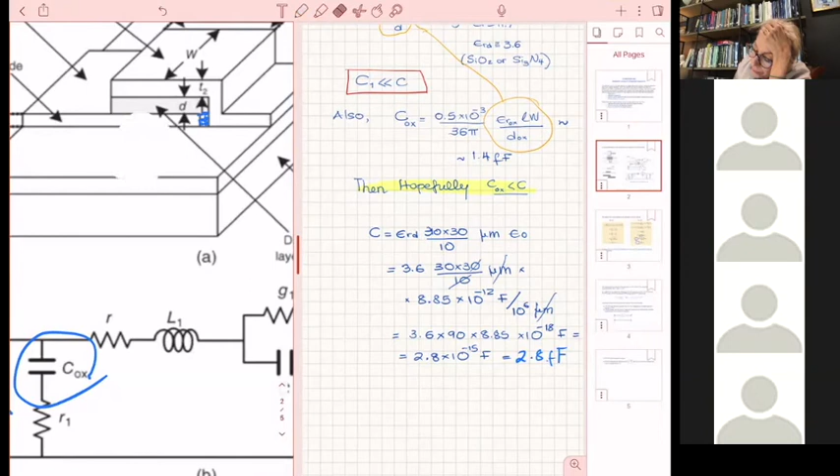Okay, so those are all my questions. Appreciate it. Sure.

Dr. Takehi, I have a quick question about the project for this week's assignment. When we're looking at the matching networks to match the real part, we were wanting to use a quarter wave transformer, but you have to change the characteristic impedance of the line to do that. Are you allowed to do that within microstrip technology?

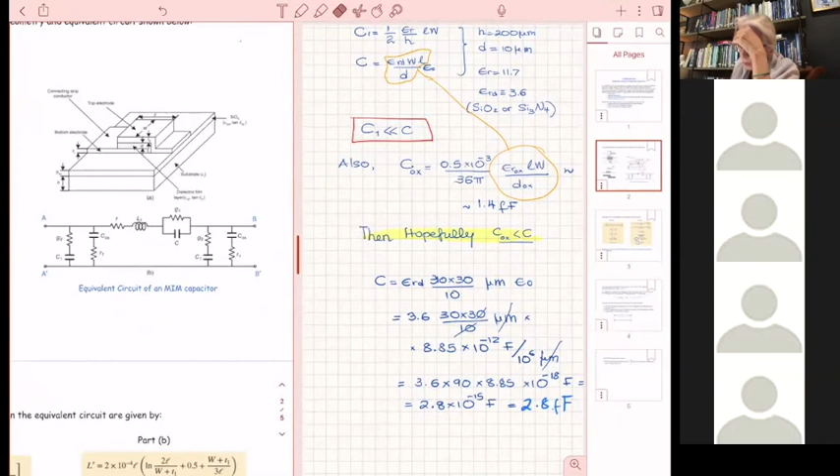Of course. You know how you do that? If you have, for example - it's very easy in microstrip - if your microstrip on top, looking from top, that's the signal line. Say for example a microstrip that is on a layer, let's assume this is silicon oxide with 5 microns, and epsilon sub r in this case is like 2.6. Approximately a 50 ohm line will be somewhere between 5 and 10 microns. Let's assume I want to do a line which is 80 ohms - then I just make it narrower on top like this. So if this is 50, this is going to be 80.

Okay, that makes sense. Thank you. Yeah, sure.

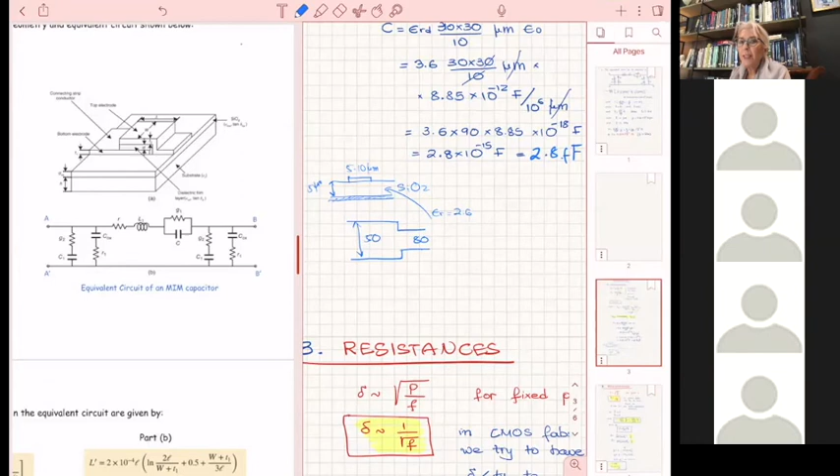What is the permittivity value - was it left out of the homework, or was there an equation? Whose permittivity, mu, or the permeability? The resistivity of the metal traces. If you say aluminum, you can find it - resistivity of aluminum is anywhere about 2.65 times 10 to the negative 8 ohm meters. Which leads to my question.

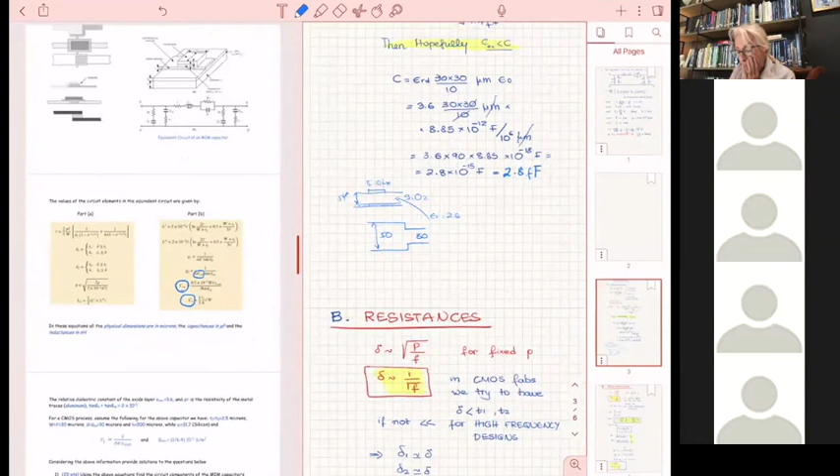Which you see the delta on the formulas? Yes, in order to make this work, to get that delta into micrometers - do we just leave resistivity in ohm meters, or put it in micrometers ohm? You make it micrometers, but F you keep it in numbers, like F is going to be, if it's 1 gigahertz, you make it 1. Yeah, I heard that part of the lecture, I was wondering about resistance. But the other thing you can do - first of all it's very interesting, that's the other thing I like about these kinds of problems.

The interesting thing here, which I'll talk about later, is that this one is like a constant, 1 over square root of F. See that? So if you solve, you can find the delta, which is called the skin depth. You can find the skin depth for aluminum, and they'll give you the value at 1 gigahertz from the maker. Then you take that value at 1 gigahertz and divide it by square root of F, and that's it.

All right. Thanks. See how you can do that?

So is F something we're supposed to solve for, or are we supposed to plot the equivalent impedance in relation to W? Yes, you can see here what you're referring to. It's very interesting how important this F is. All of the resistors, all of the resistances, that's something to keep in mind, the equivalent resistances that come out of metal losses vary as square root of F.

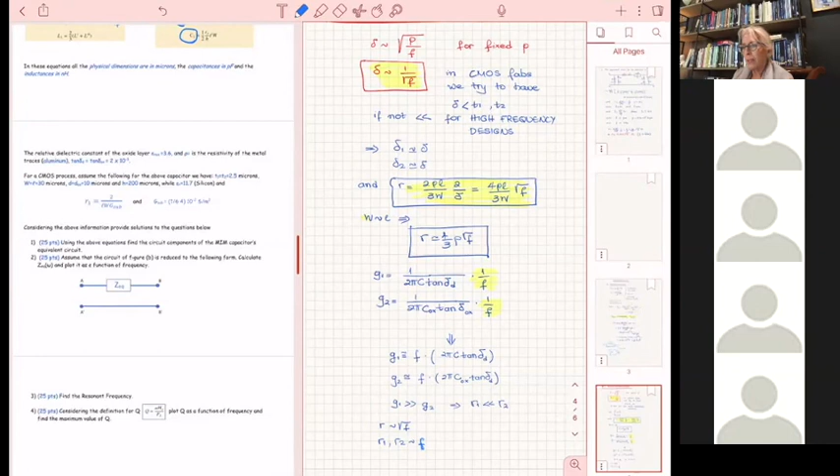It's so time consuming, and everybody's using MATLAB nowadays to do these kinds of things. So you leave your square root of F and then you do the plotting easily. In your case, if you don't do that, I would just give a few frequencies, because if the resonant frequency is so high up, the performance of the Z eq is going to be kind of smooth.

You can get a few points, unless you want to go and plot it around. Did I say around? No, I say calculate and plot it as a function of frequency. So if you don't have any way of plotting it through a plotting routine, I would say just get a few points, calculate for those points, and plot them. But it will be easy to do it on MATLAB or something else, whatever else you may have.

Do they have, a question I have, do they have MATLAB as a requirement? No. Well, when I first came to A&M in the Introduction to Engineering course, they ran us through MATLAB, but I don't think the university provides it anymore.